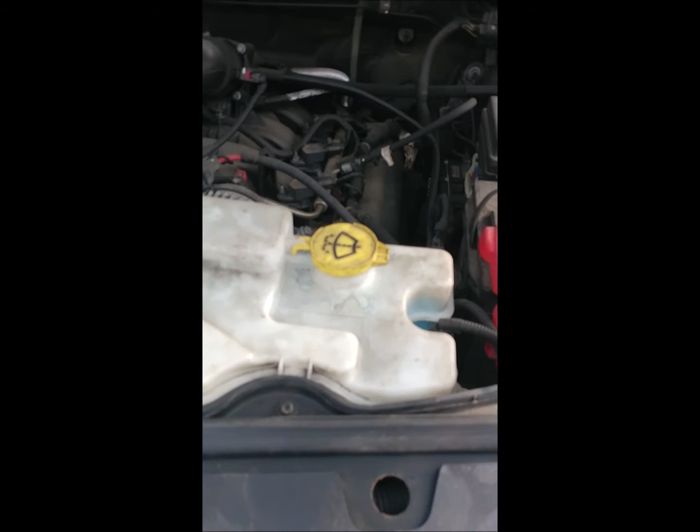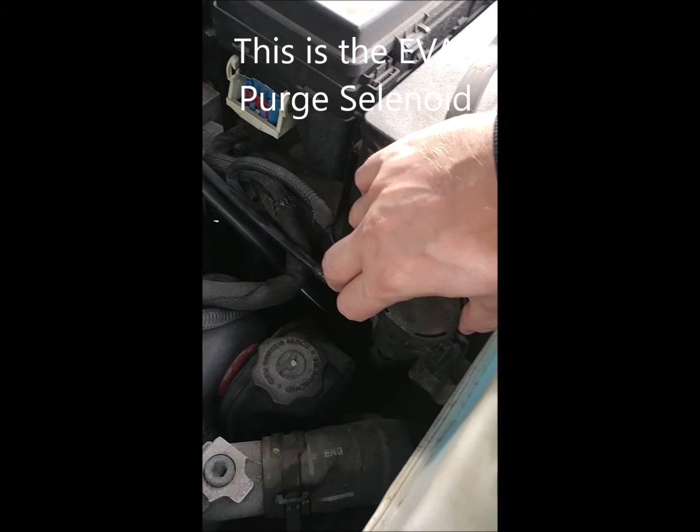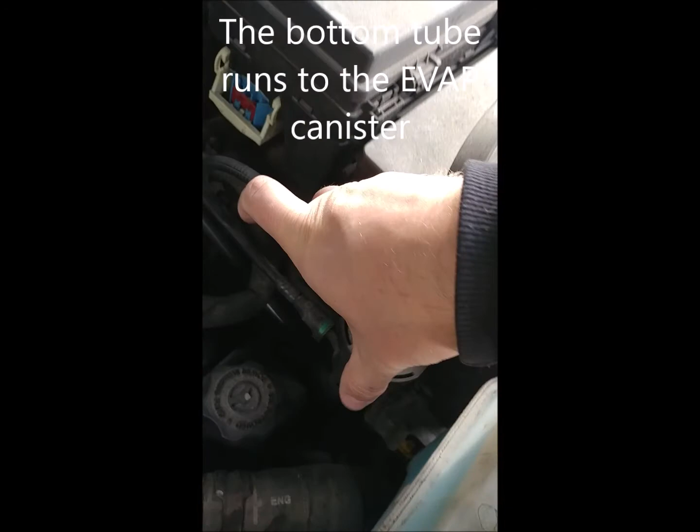So here I got the hood open, and I think I found the leak. According to this video I watched, this thing right here next to the battery is the Evap system. And it actually just comes right off. There's 2 tubes that go out of it, and they go all the way back to the gas tank apparently. And so here's one tube, and here's the other tube.

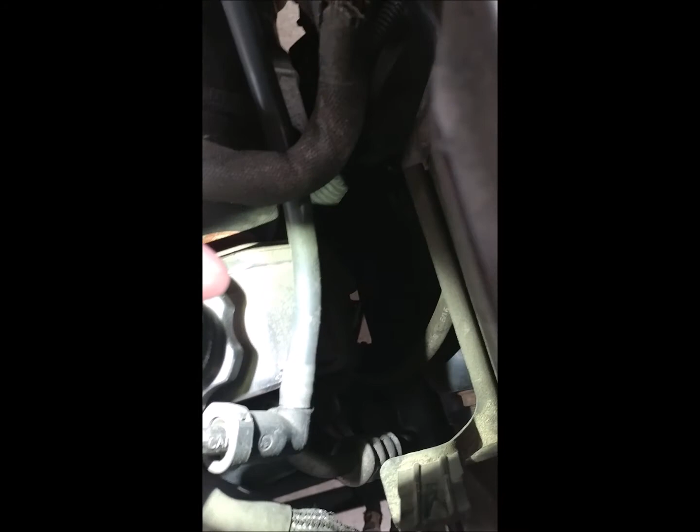The side of that tube down there, right around where it's connected to the thing, has little tiny cracks. They're not big. It's not noticeable. If you look all the way in the back here, the line actually runs right there. Let me focus on this thing.

So there's the line right there connected to the firewall. It's really hard to get a good image on it. If you look down to where it connects right there against the wall, there's the little split in the tube. I think that's what I have to replace.

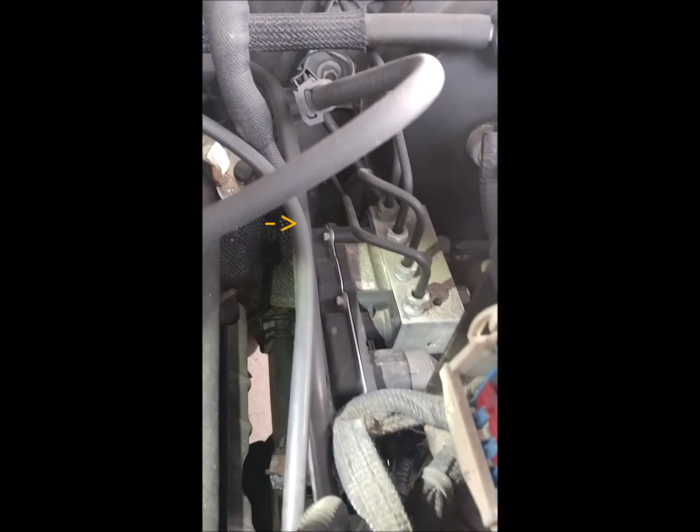So that tube goes to there, comes around here, and connects to there. It's actually the whole thing basically. So this part right here is starting to crack a little bit. There we are. I can see a little bit. It's starting to crack. That one is cracked open.

Right down there is the other end of it where it connects, and that part is cracked open. I think that's where my leak is coming from. So I'm going to see if I can find a replacement part for that, and I should be able to remote start my car then.

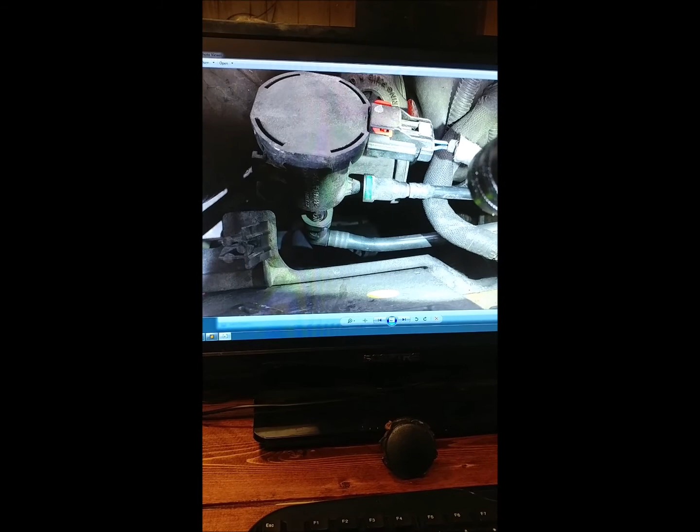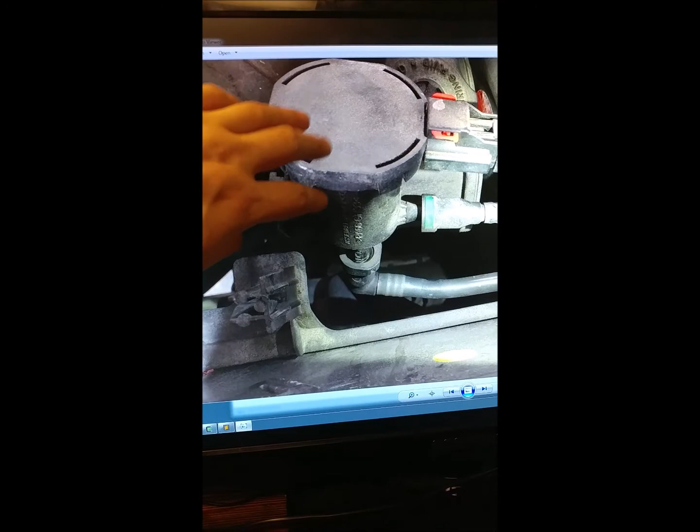In the video I was doing, I had the hood open in the Jeep, and I was looking at a bunch of parts. I looked at this part in particular, which is right next to the battery. This is called the Evap Purge Solenoid, and the battery is sitting right here. So this is the front of the car, where the hood is. This is right next to the battery in front of the hood.

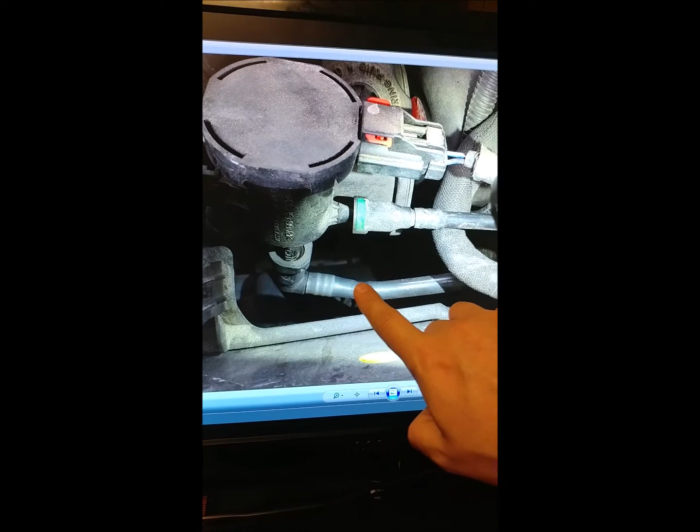So this has 2 tubes running to it, this part right here and this part right here. The way it works is there's a thing called an Evap Canister underneath the vehicle, right in front of the rear differential apparently. It's supposed to be connected to the gas tank. And it handles emissions, which from what I can gather is the vapors that come off of the gas tank. It collects them and recycles them back into the system so that they can be reused.

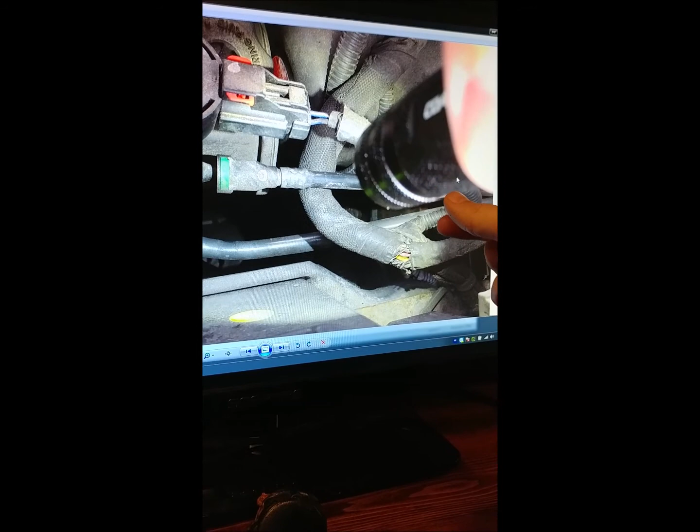So this is where it flows from underneath the vehicle. There's the firewall that has the tube coming out of it with the split on it, and this is the tube right here. It comes through here, it connects to the Purge Solenoid, that's the part, and then it goes out through this tube, and this runs to, I think, the air filter. It might run back into the block so that it gets recycled and reburnt.

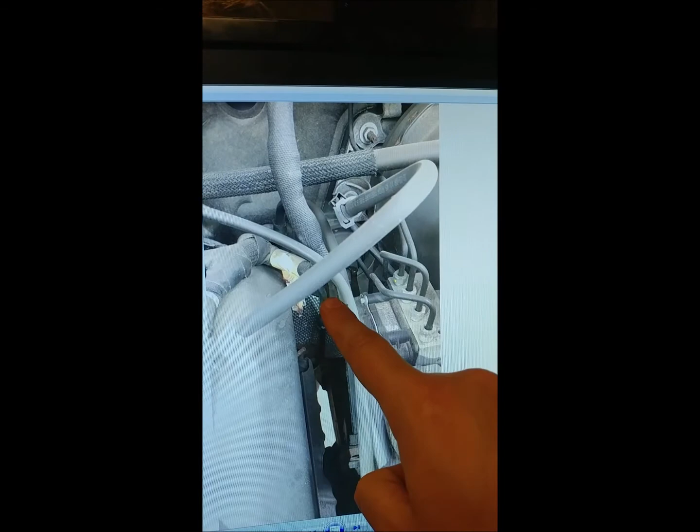This is the part that's split right here. This is where it's actually connected to the firewall, and there's my split right there, the split in the tube. And this goes down into the firewall and back to the Evap canister.

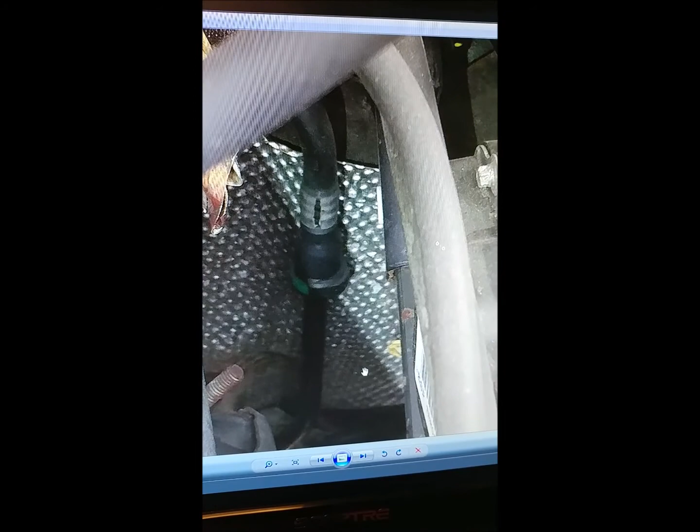So I thought this would be easy. I went to the auto parts store down the street from me, went in and said, "Hey, I need this Evap tube. It's the one that's running to the solenoid next to the battery." The lady in there spent a couple minutes searching through the system. She mumbled about not being able to remember what the name of the part was.

She said it was called something special, and I didn't really know what she was talking about. And after some time and some deliberation, she advised that I contact the dealership where I bought the car and ask them what the part number is for this, and then come back.

So I went outside into the parking lot. I called the Chrysler dealership where I bought this car. I spoke with the parts department. The guy was pretty nice. He humored me for a little bit, looking for this part. And he said he was looking through diagrams and he was trying to find the exact part in the diagram, and he was kind of confused by it.

And I thought he was kind of pulling my chain a little bit, but after we hung up and he wasn't able to give me the part, I think we got disconnected. I went home and I came online and I did some research and I started looking around, and I found myself in the same type of situation that he was describing.

So I wanted to make sure that I did a video on this, because a lot of the online guides to replacing this part don't go into depth on this particular aspect of getting the part. They just say you need an evap tube, and that doesn't really do any good. So here I found myself at this page called Factory Chrysler Parts. It's factorychryslerparts.com. I put in all the information.

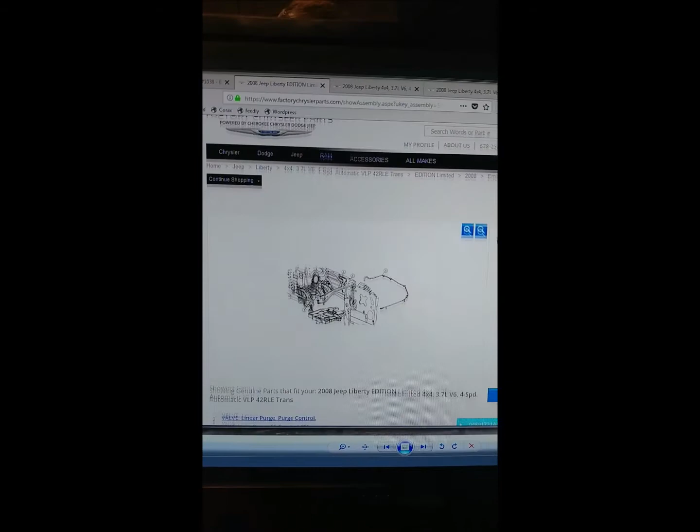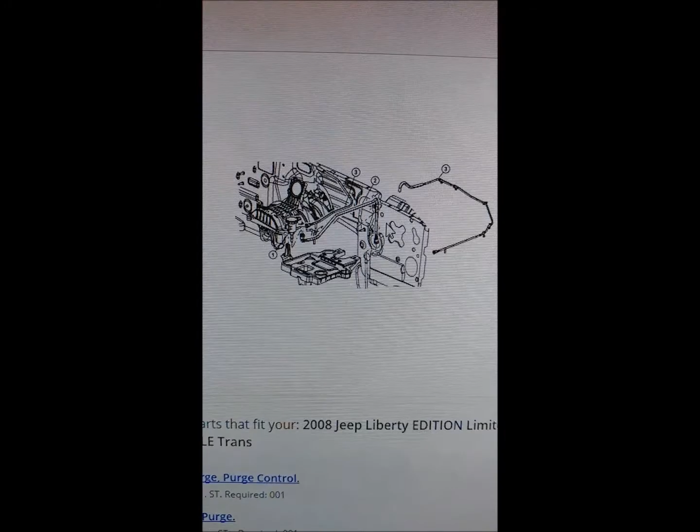I just ended up in here, and you can see when you open this up that there's a diagram kind of, and if you zoom in on this diagram a little bit closer, you can see a couple parts here. There's this thing. It's got a 3 label pointing to it, and it looks like this is the firewall. And if you look really close, this is where the battery would be sitting. Here's the Purge Solenoid right here. And then there's 2 tubes, if you see.

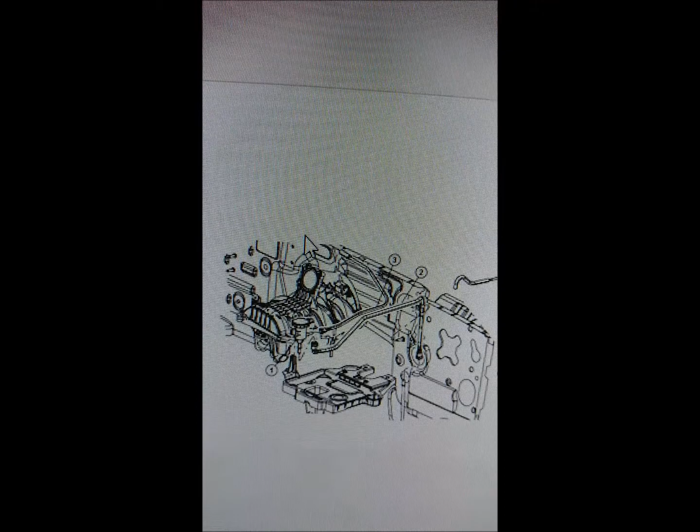There's a number 2 pointing to this one that is coming up out of the firewall, and then along and connects to the bottom of the Purge Solenoid. And then there's that second tube that runs out toward the air filter. So this number 2 is what I'm looking for. And so I come down here, and there's a couple of items listed. There's a 1, 2, and a 3.

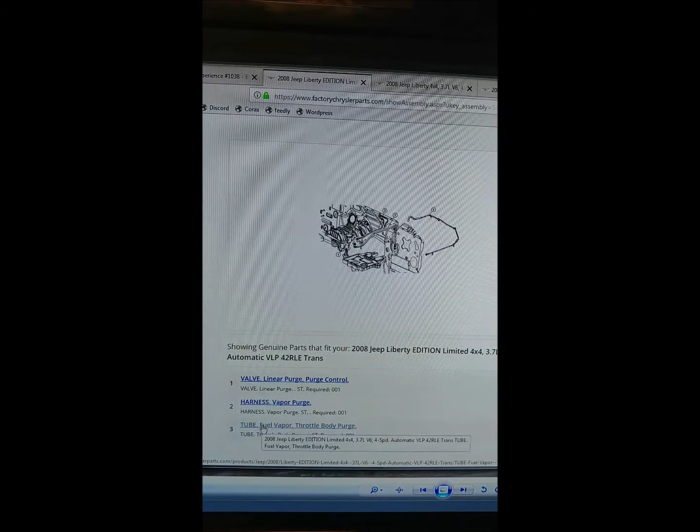And you see that some of these actually prefix the names with the category of the part, kind of like if it's a tube or it's a valve or a harness. And since this has the number 2, it's real doubtful, because number 3 is a tube and number 1 is a valve, which it's pointing to the valve right there. These 3s are tubes, and then this tube right here is a harness, apparently.

A harness vapor purge. So I went in here, and there's a couple options for it, but it basically gives you 3 part numbers. Let's see. It's this one right here.

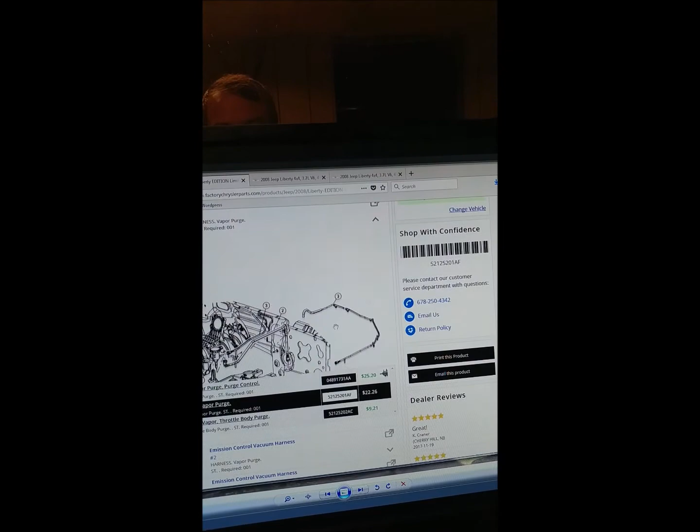521. What is it doing? Oh, here it is. So if you look at this, there's actually 3 part numbers here: 521, 25201 AF, AC, and AD. The main one listed here is 1AF, and it says it's 2226.

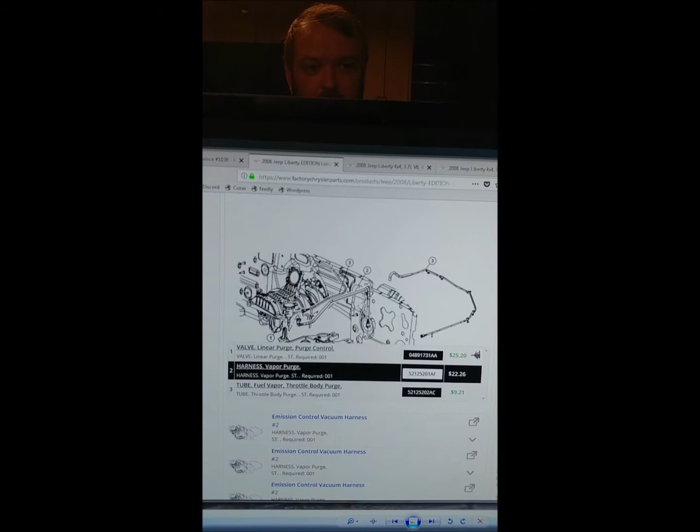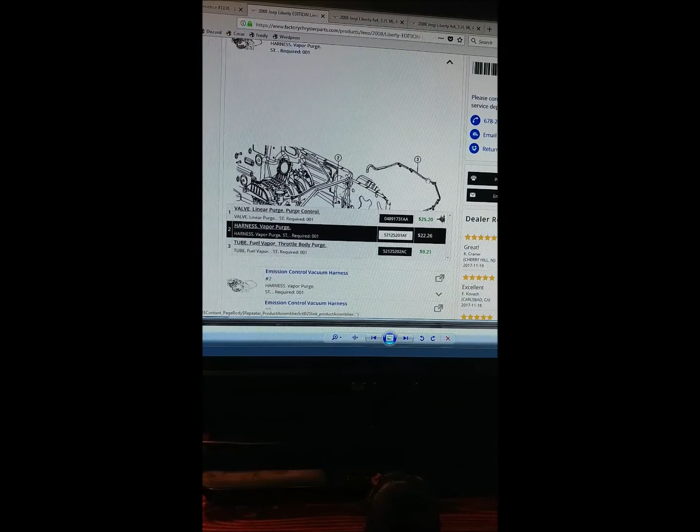I did end up purchasing this part, but I didn't purchase off of here. What I did instead, I believe that I went to Amazon. There's no reason not to order the part on this page. I googled up some reviews on it, and there was a guy who was unsatisfied with his expectations versus the actual reality of the service that he received, but it didn't have any indication that this website itself is invalid to order from. So I looked for this part on Amazon,

and I believe the Amazon page that I ended up ordering from, I got the 52125-201 AF part number. Found it on Amazon. It was $32 with shipping, and it arrived 4 days later. It worked out pretty well. I just recorded the product page, basically. I screenshotted it. So here, we'll just take a look here.

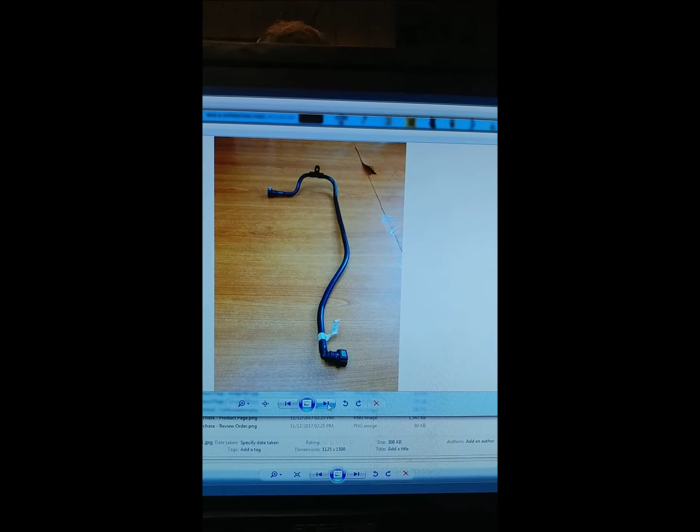Here's what the Amazon page looks like. It says Dodge Nitro Jeep Liberty OEM Emission Vapor Purge Harness. You can see it's got that part number on this tag. It's got a couple of images for the part. It looks just like the part that was in there. Basically, it's got all the clips for the firewall attachment, and then the Purge Solenoid attachment, made in Mexico.

And so I ordered it, and then it arrived. So here it is. This is the part. This is how it came. It's just in this piece of plastic. There's the tube. There's the attachment that connects to the firewall attachment. And then looks like this part is what connects to the Purge Solenoid.

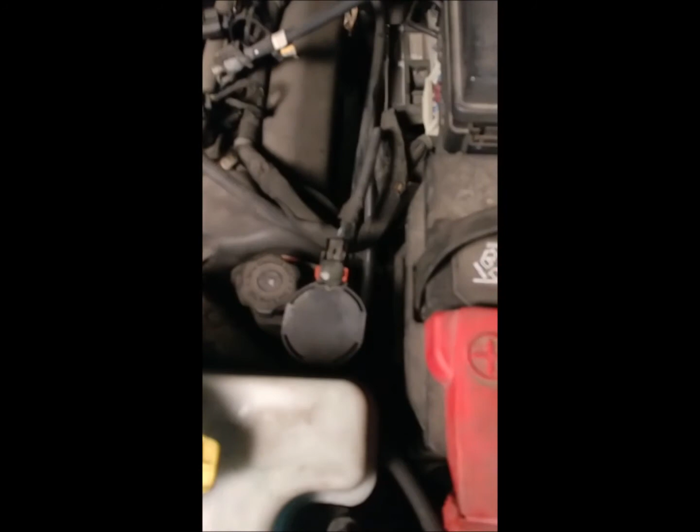So what I'm going to do is go out to my Jeep, take the old one off, and put the new one on. And hopefully we'll be able to begin using my remote start again after this. So here's the front of the hood. Here's the battery. Here's the Purge Solenoid. This Purge Solenoid, literally you just lift it up and it comes right out. And here are the two tubes connected to it.

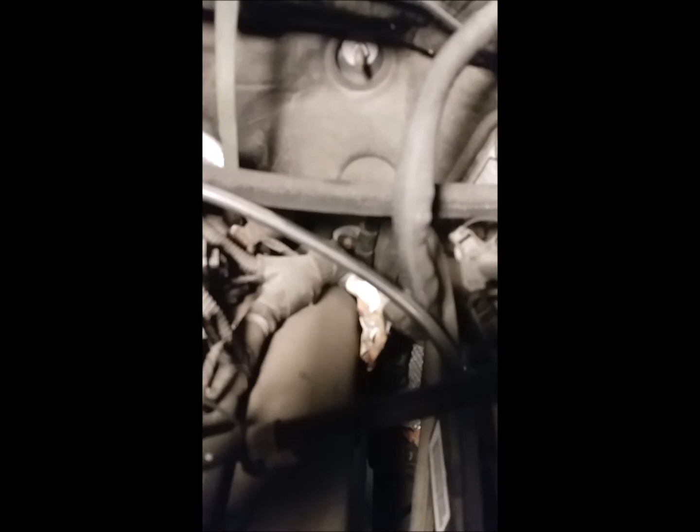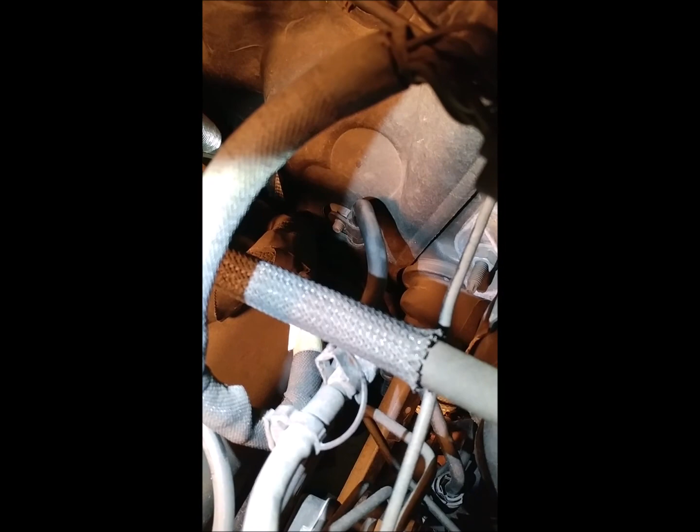Here's the bottom one running back to the firewall. You can see there's a little nut there that it's pushed onto. And there's where it's connected down there. Hard to see from this direction, but there's where it's connected. There's that green little knob there. I'm just going to push that in and pull it off of there. I'm going to try to pry this piece off of this nut. I think it's just an open thread. I think you just pull it right off.

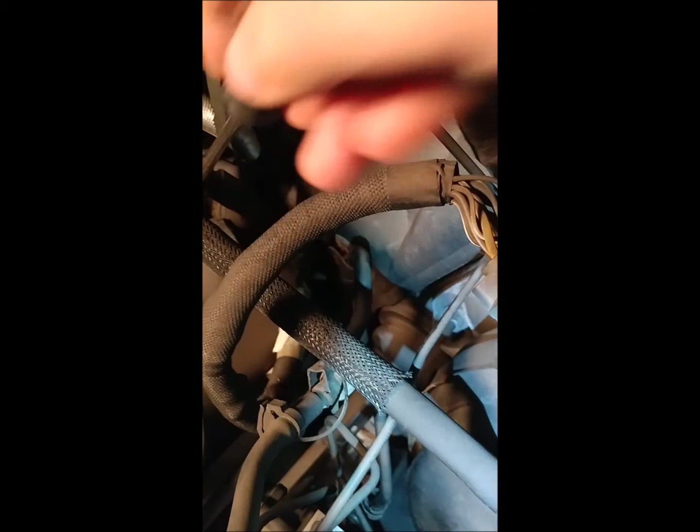And then I'm going to disconnect the green. The same thing over here, it's just got a green button that you push in and it disconnects from there. So I'm going to pull that off. Where it's connected to the firewall and that nut, I already have it off, but I just put a screwdriver in there and pried it off basically, and it came right off. So that was a little easier than I thought it would be.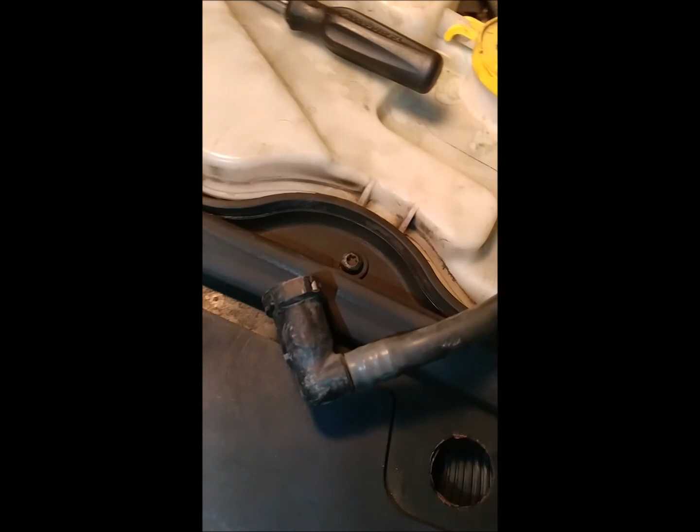Earlier I said the green button on the bottom of the solenoid. It wasn't the green one, it's the black one. I was looking at the wrong one, but I meant the black one. It actually has a black button on it. The replacement part actually has two green buttons on either side that you squeeze in.

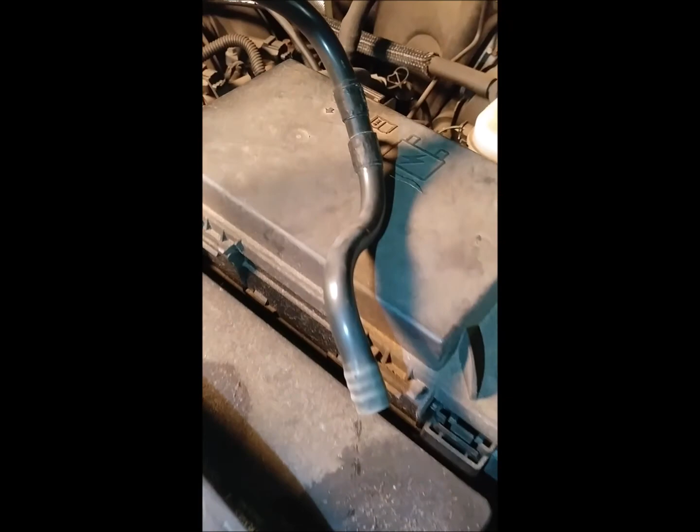This tube is out, but you see the little connector on the bottom is not. It's still in there. It's got the green button on it. It's really hard to get out. I'm going to stick a pair of pliers in there and see if I can pry it off. This black part was really hard to get off too. Ended up using my pocket pliers to hold that in, and then just worked it out really slow.

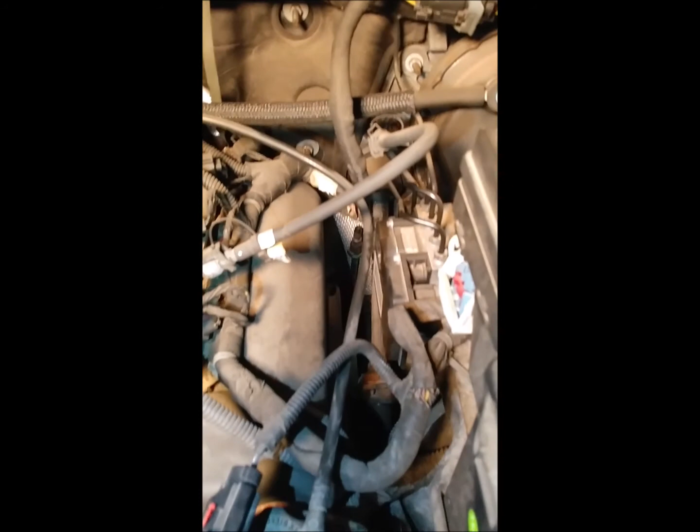And it's really hard to work in there because it's really cramped. Your hand is up against the firewall and the block, and it's just not an easy place to put pressure on that little green clip and also work the thing off of the tube that it's on. So I'll just keep working. I actually just used my hand.

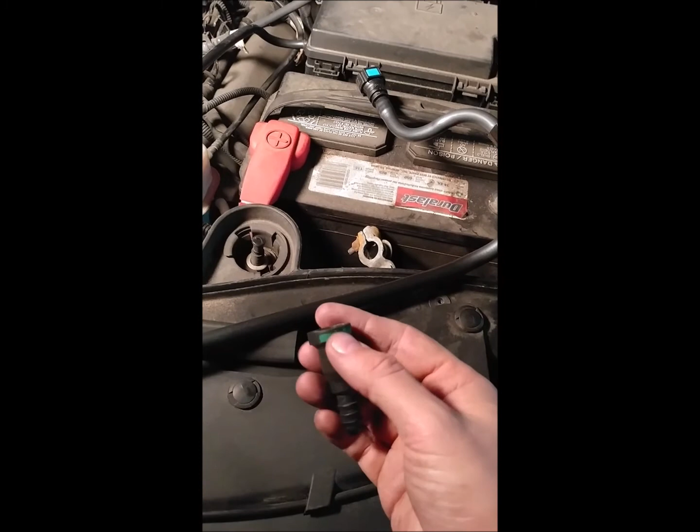I didn't want to stick my pliers down there. And you have to push this green thing in with your nail or your finger. You've got to push it in real hard, as far as you can get it, and then twist, like yank it off. Came off. There we are. Here's the replacement part.

This piece is going to get connected to that nut. The bottom of this has the connectors; these are a little bit different. They're two-sided. You push this in and it squeezes it out. Both of these, there's a blue one on the bottom piece and then a green one that connects to the purge solenoid. Does the same thing.

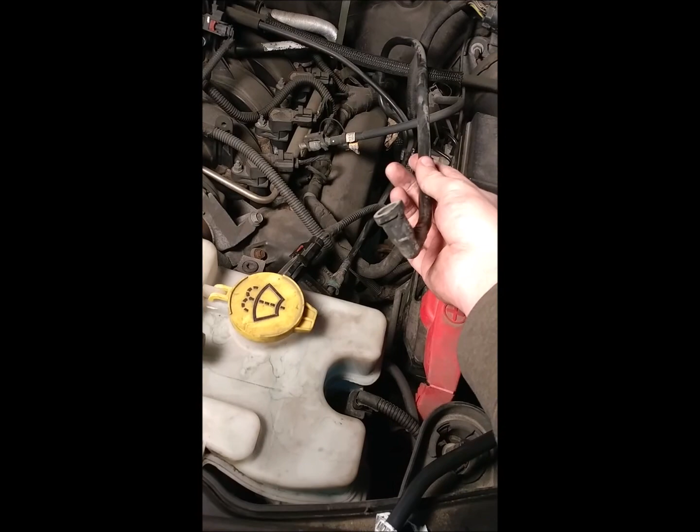One note about this tube is it's underneath all these wires and alongside the block and everything, and it's actually underneath all of these. And this is a real act to get this out. It's twisty Olympics trying to get this out from underneath all these various tubes and wires and stuff without breaking anything. So I slightly bent it a little bit getting it out. So I'm going to try to be a little more careful getting the other one back in.

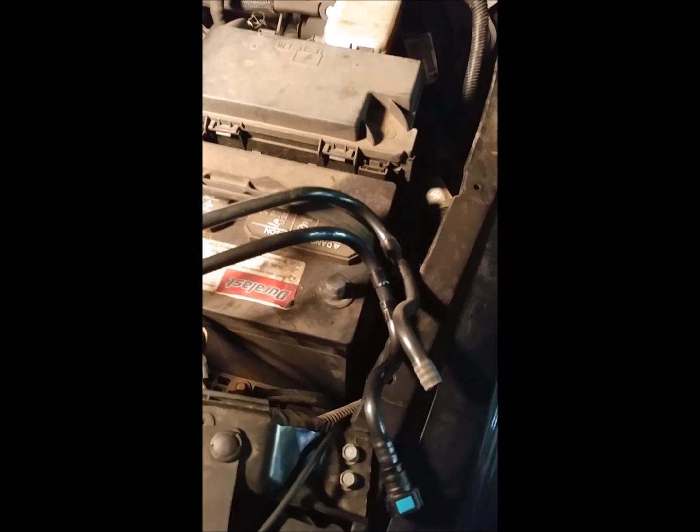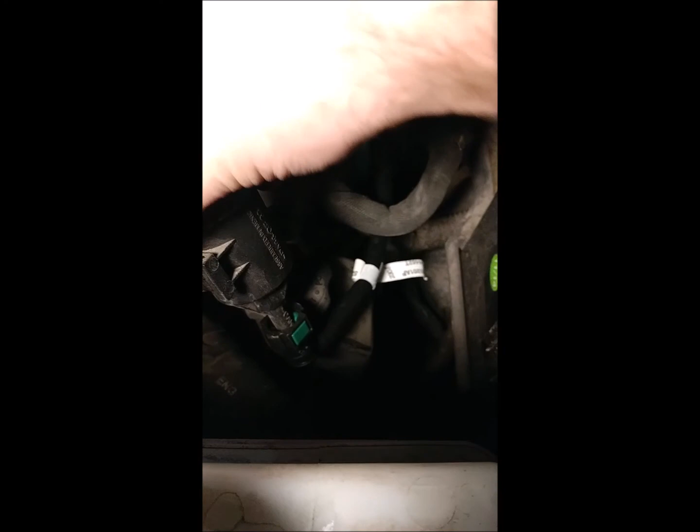But just for comparison, to make sure, these do appear to be the same parts. Lay them right on top of each other. They're about the same lengths. So I'm going to stick the new one in. Tube / harness is reinstalled. I just stuck the bottom of the green part of the tube onto the bottom of this and pushed it on until it clicked.

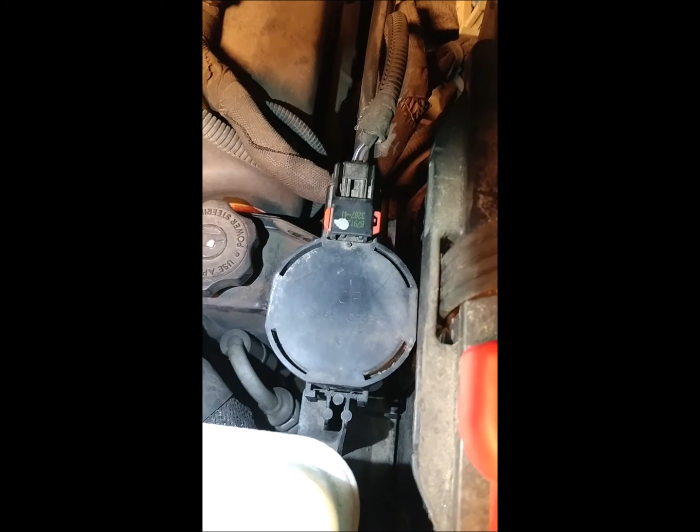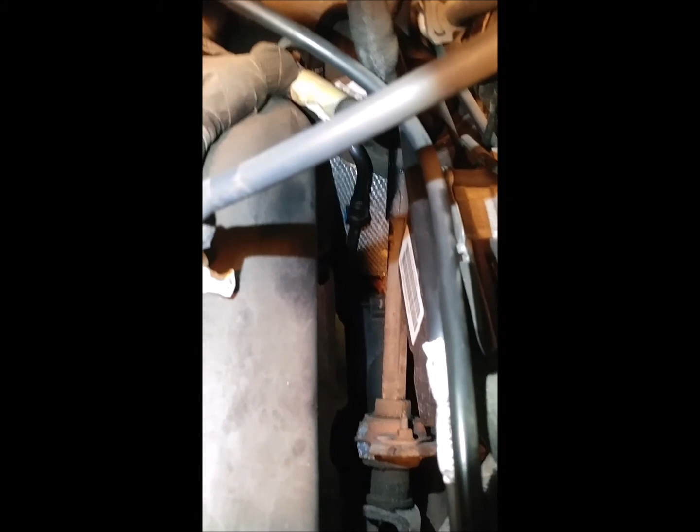And then I just reattached the solenoid to this; there's a little brace right here that it connects onto. Just push that down onto it. And then I just ran this tube harness through here. You can see it's connected down there. I pushed it onto the tube and I just pushed it down until it clicked. I'm pretty sure that pushing down on the tube doesn't cause any real damage to the tube itself underneath. But that's clicked on there.

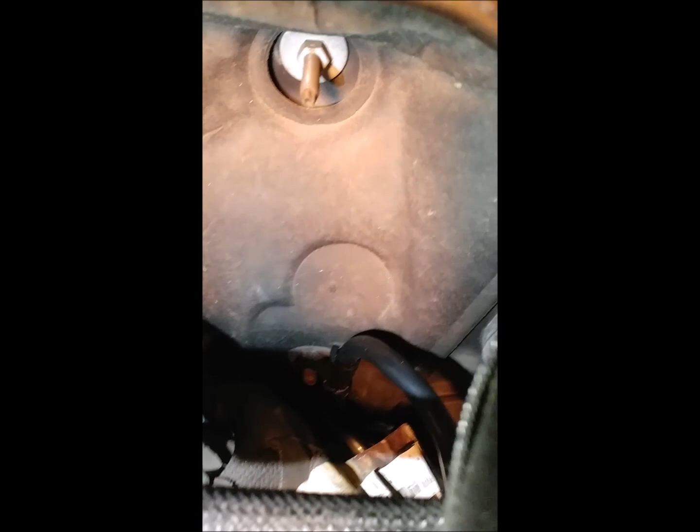And then this is connected through here. I just took a screwdriver straight at it and kept pushing it on either side of the nut until it went on. It was kind of a battle to get it on, but it went on, and now it's all connected. Now the test is I'm going to drive around with it. We'll see if the check engine light goes off. If it does, then I should be able to do a remote start, and the remote start should last more than a couple seconds.

The actual symptom that got me looking into this wasn't that the check engine light stayed on for months. It was that my remote start would only keep the car on for about 3 seconds before turning it back off. So apparently it will not run if the check engine light is on. And so now hopefully it does. So I'll update once I get that.

I put the battery terminal back on. I did not let it sit. I just put it back on. I'm still in the garage actually. I started it up, and the check engine light is not on right now. The air pressure light is on, obviously, because my rear left tire is below the mean of the other 3 tires. But the check engine light's off.

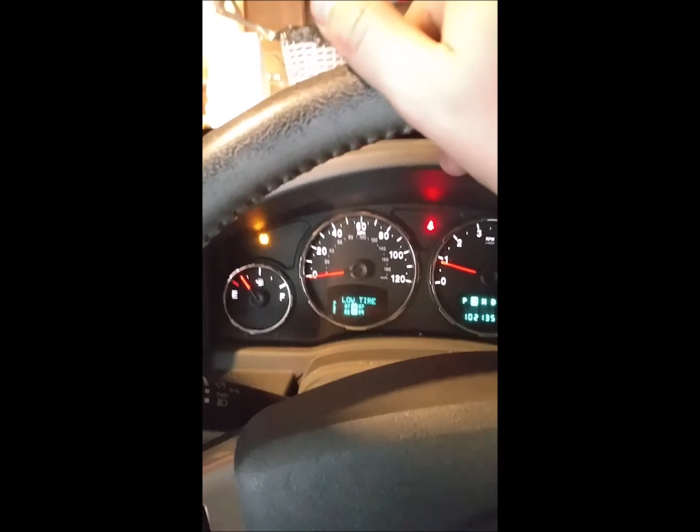I'm pretty sure this is an initial indication that replacing the harness / tube did the trick. We'll give it a couple days, see if it comes back on. If it doesn't, then I'd call this a success. I'm gonna begin testing that the remote start works immediately. So that's it for now.

Since Sunday, it's Friday, so it's been about 5 days. I've been using the remote start every day, several times throughout the day. I refilled the fuel about a day or 2 in. Put the gas cap back on, just normal, a couple clicks, nothing excessive. The check engine light has not come back on, so I'm considering this fixed.

$32 for the part. Not sure what it would have cost me if I'd gone to a shop, but I'm sure I saved probably $100 by doing it myself. It wasn't too bad. The worst part was finding the part, figuring out what it was called, figuring out the part number, but that website was really helpful.